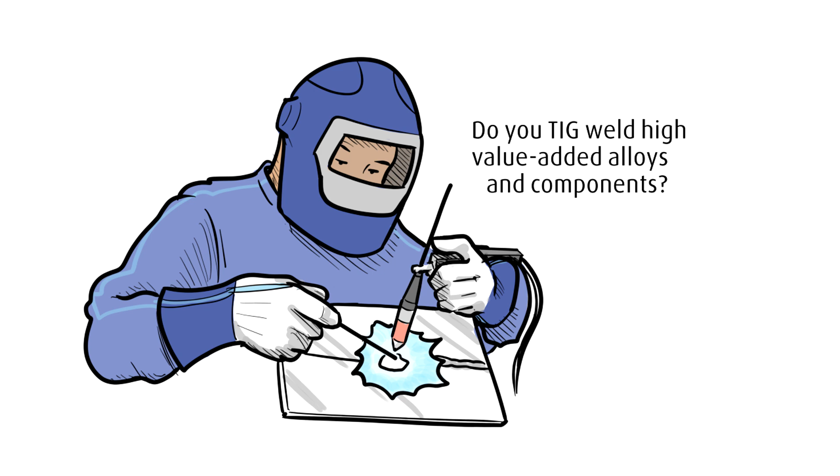Do you TIG weld high-value alloys and components? Is it important for you to retain the anti-corrosive properties of your weldment and to have consistently clean welds? And how about creating a safer workplace by avoiding the use of hazardous chemicals whilst reducing the impact on the environment?

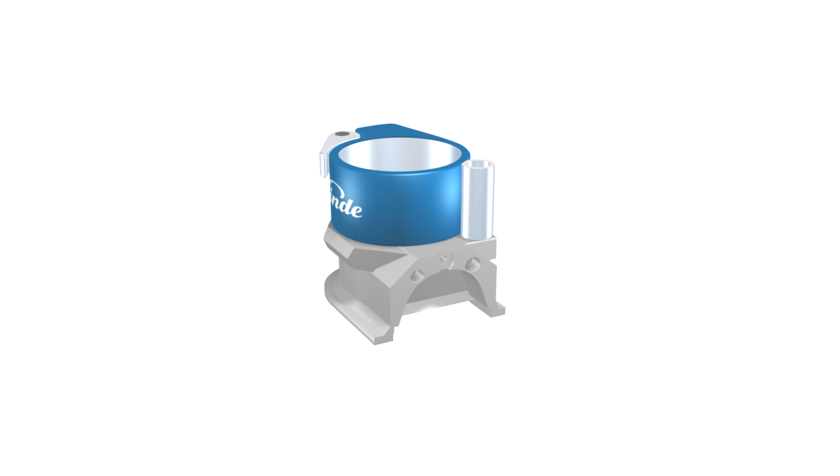The Linde Arcline MT Modular Trail is an add-on component for optimizing protection against oxidization and other atmospheric contamination while TIG welding. It offers unique technological features that raise welding performance compared to common shielding gas trails available today.

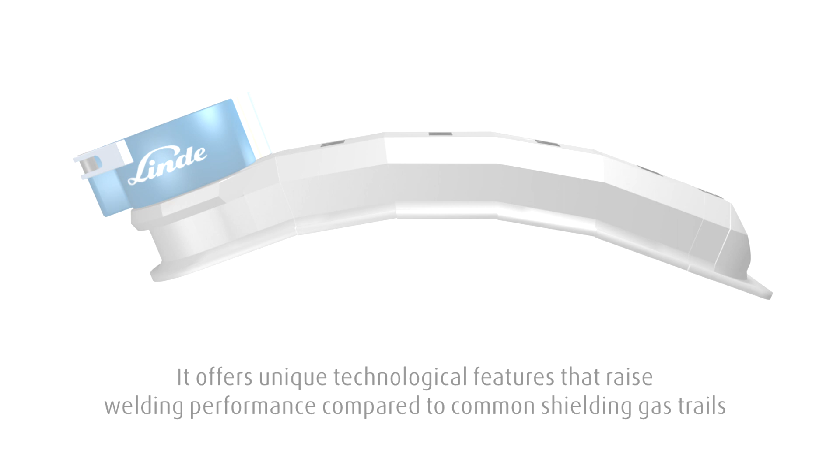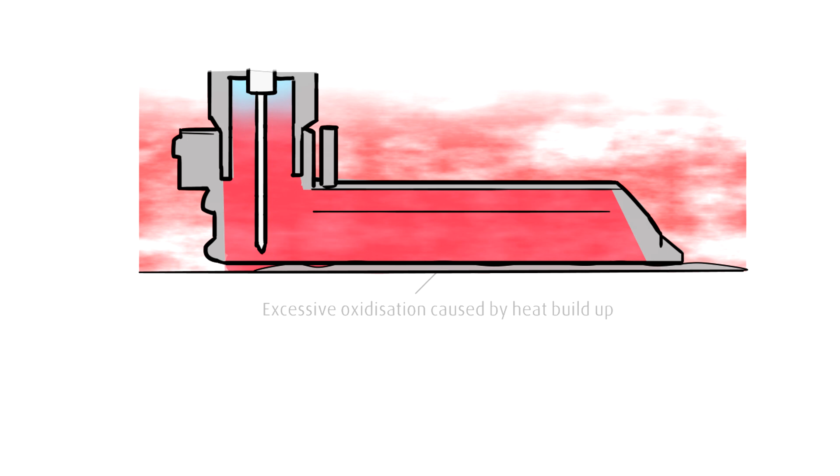Working with TIG welding and sensitive materials such as stainless steel, nickel, or titanium alloys means we need to control the excessive oxidization caused by heat buildup in the metal surface. Arcline MT can help.

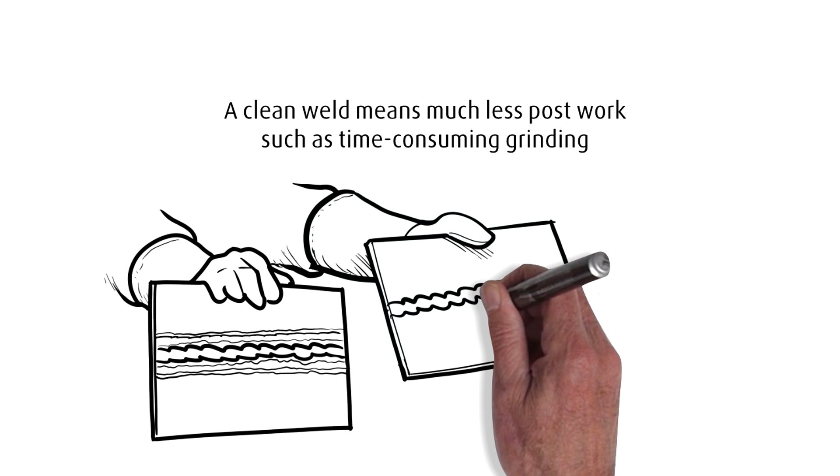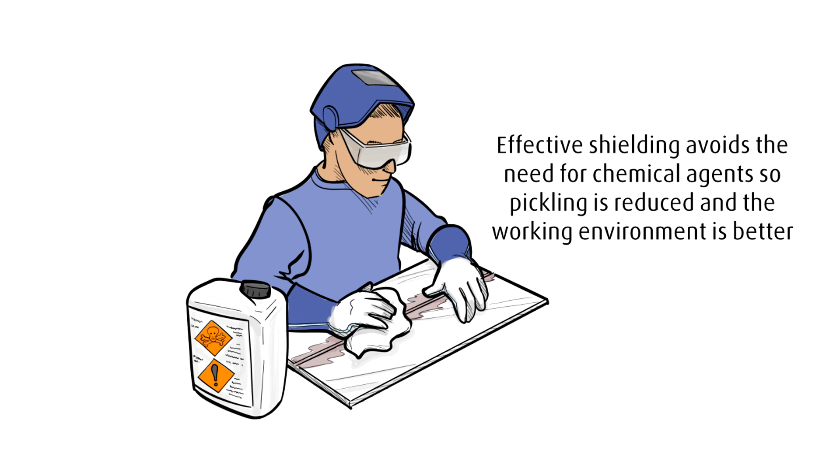The Linde ARCLINE Modular Trail provides exceptional shielding quality by controlling the environment around the weld. A clean weld means much less post-work, such as time-consuming grinding. Effective shielding avoids the need for chemical agents, so pickling is reduced and the working environment is better.

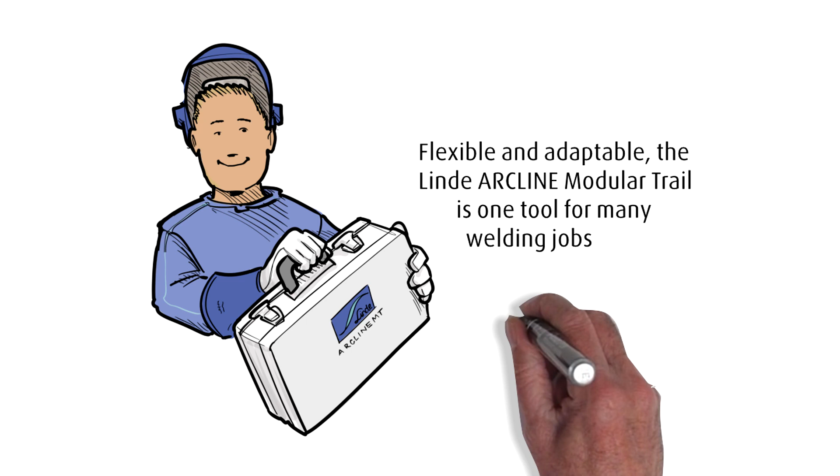Flexible and adaptable, the Linde ARCLINE Modular Trail is one tool for many welding jobs, removing the need for multiple systems. Simply adding modules will adjust the length of the trail.

The ability to adapt Linde Arcline MT to match curved forms brings an extra level of flexibility.

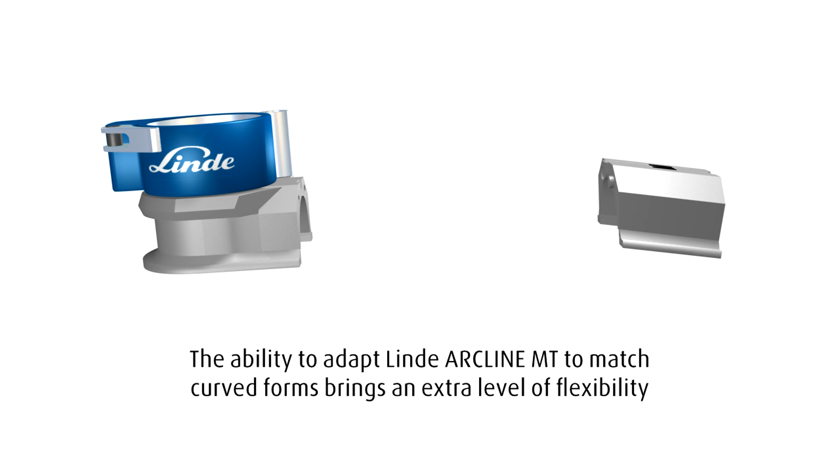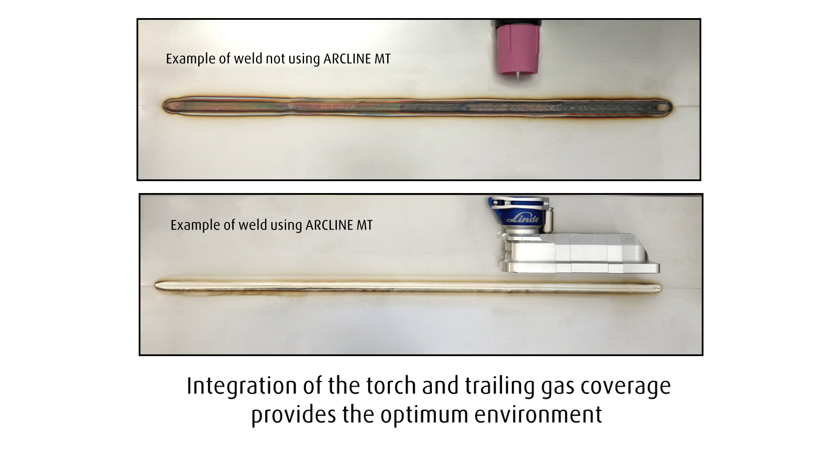Integration of the torch and trailing gas coverage provides the optimum environment to create a clean weld every time. Our vast experience with shielding gas has created a product offering superior protection with expert parameter recommendations.

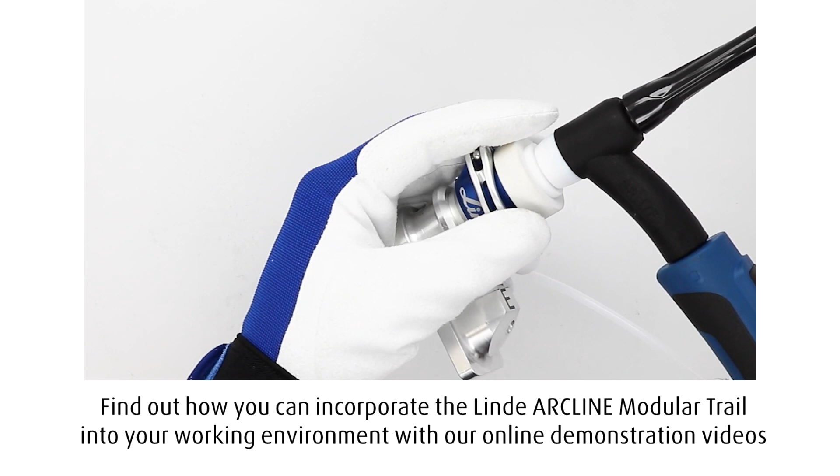The Linde ARCLINE Modular Trail. Flexible and simple. Your cleanest weld is yet to come.